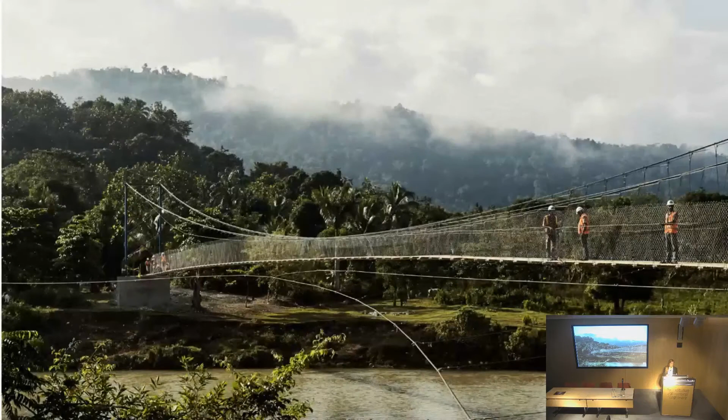That's so exciting, and bridges are such an obvious piece of human genius. Looking historically, to be able to cross from that binary, from having access to not having access, is just one of the most powerful sights.

So here's a community in Chameau in Haiti. This river is currently in the dry season, and I want to talk about this structure specifically a little bit later this evening. But can you imagine living on the far side of that river, and you're one of the 40,000 people where the only way to cross that river is to swim? Keeping in mind, this is the dry season. Can you imagine when you've got someone showing up and being like, hey, we could do something across that structure?

That is out-of-this-world kind of innovation. That is the aspirational quality that you can't even show in pictures or videos. You aren't really able to demonstrate what that means until you've actually had the opportunity to show someone in real time.

That innovation for us—I'll get into scale a little later—but the first time we go into a region or district, like Chameau, our first long span structure out in Jérémie in the west province of Haiti, people don't really get it. If we're thinking about not just connecting one river but connecting all people in an entire region, you have to go in there and do some of the hard projects up front when no one really knows what you're going to be up to.

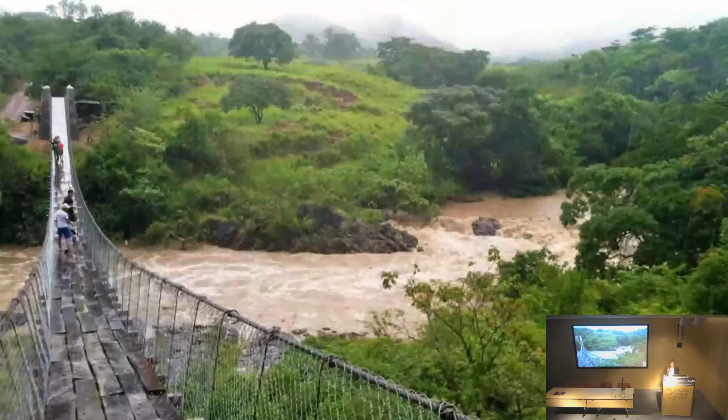I think you're crazy. But I've seen this over and over again, and I probably overdid the photos. What's exciting for me personally is that when I got involved, I was like many of you—I was in that place in life, thinking about what I could be doing with my engineering skills that would help humanity. That could be right there in Iowa where I grew up, or certainly in Colorado where I was going to graduate school.

But there was just some sense of, what am I going to be doing with my day that's going to be helping people? I hope all of us know everything we do is about serving society, every single day—that is why it is such an honorable profession. But it's hard to demonstrate to a young 22-year-old who's just graduated that all the physics and math, even if you love statics and dynamics, translates into people.

And the first time that I built a bridge—it wasn't this one per se, but it was similar—I had that profound sense of: this is why we do what we do.

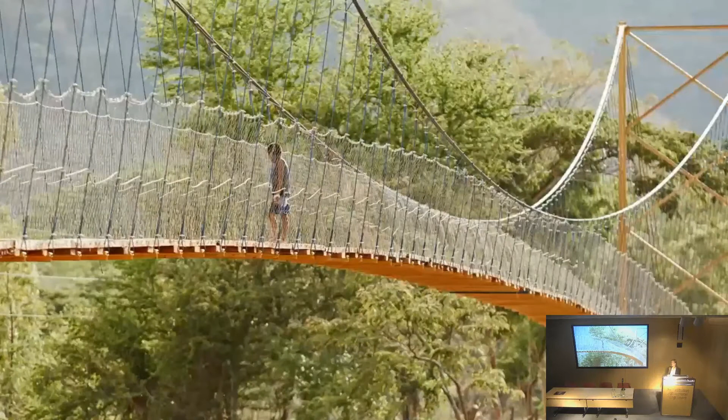And about a decade later, we're building something much more complex like this. It's actually not that different - it's a structure that is helping serve people. And I think what's really exciting for me personally and for the entire organization, Ian, our chairman, has seen us go through an evolution.

We really used to talk a lot about the bridge - how do we improve the design details every single day, how do we republish essentially a standard of best practices every year, how do we go bigger, go longer, go more efficient. What I'm here to share with you guys this evening is a little bit of why we are moving away from that. It still takes a global army, and it certainly still takes a lot of engineering.

But as we start to pivot and think about designing for the rural last mile, we're talking about innovation that is not going to be structure by structure. We have such a distinct privilege in the developed world to have resources, to be thinking about having signature projects that are unique in every place and prescribed exactly to fit the community and everything anyone could ever dream of, when budgets allow.

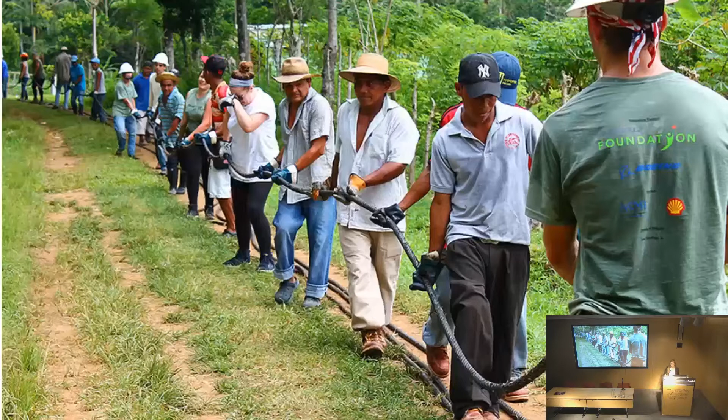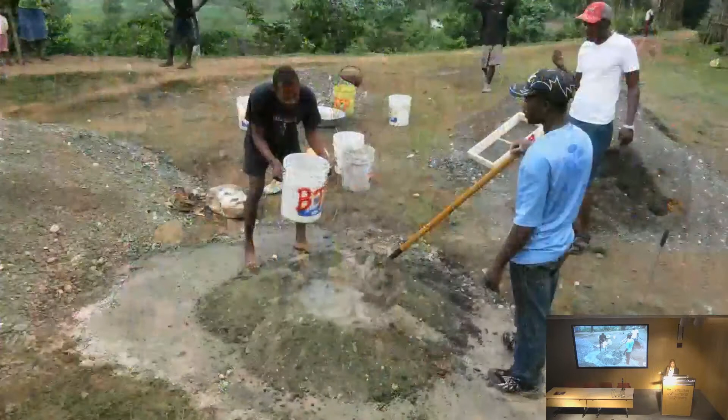And you're thinking about innovation through the lens of how are we going to get this super heavy cable up and lifted. And we're thinking about innovation in terms of how are we going to be able to maintain a level of structural integrity when you're mixing concrete in a volcano method - also one of the more fun, not fun, things to do.

Because I have the time, I'm going to tell more stories.

So one of the first things I did in Peru - I'm 21, I've taken a civil materials class, and I was really excited about having my scale with my gravel and knowing what my sand ratio was going to be, and I knew exactly the scale of the water was going to be, and I'd even written a little paper, the pre-construction plan for my team going to Peru. I'm thinking I'm really bright - oh man, this is way ahead of the game.

And then I showed up and I was like, well, these guys are already mixing. We haven't even arrived - how are we going to do cylinder tests on that? This is not going well. I'm in panic mode. I don't have any professors around. I don't know - everything I've read, this is not right.

And, lo and behold, you kind of start to realize that a lot of things that you're taught are correct, and a lot of things that you want to apply have to be learned. I think that's a really important lesson in this kind of work, great for young engineers in particular - just to conceptually understand the difference between measuring by weight and by volume. So if we're going to improve quality in a batch, that's certainly not going to happen because I all of a sudden, in a manual somewhere on the 20th page, prescribe a different kind of weight measurement.

It's going to be having photos and diagrams of 3 buckets of water, it's going to be buckets, it's going to be wheelbarrows, it's going to be shovels, it's going to be how many times do we shovel the one pile into pile 2 and how many times back to pile 3, and how are we going to teach what a slump test looks like using something that can be done with a soda bottle - thinking about innovation in those terms.

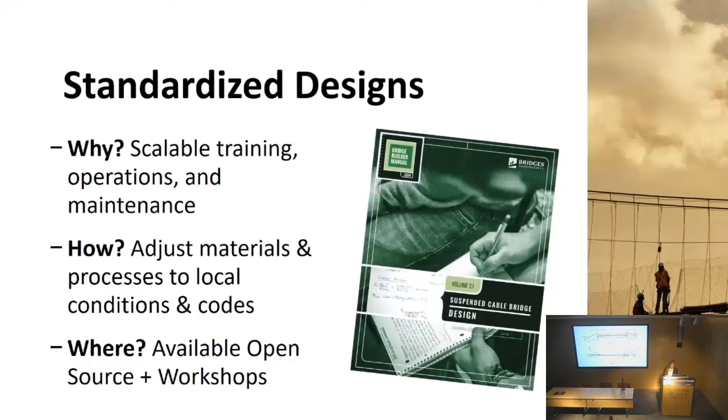10% of span roughly is our tower height, and that's predicated on a realistic sag value with a cresting structure under dead load alone. Under live load it should settle out. How do you get this up high enough to get a 3 meter freeboard unless you literally build your pedestals even higher?

So we go back to the technical advisory board and ask, is that actually going to be a better design element? Doing another meter of height when the waterway is going to come through and around your pedestal, you're going to have a greater moment arm, significantly greater moment on that foundation if you go another meter higher. I'll show you some details in a second.

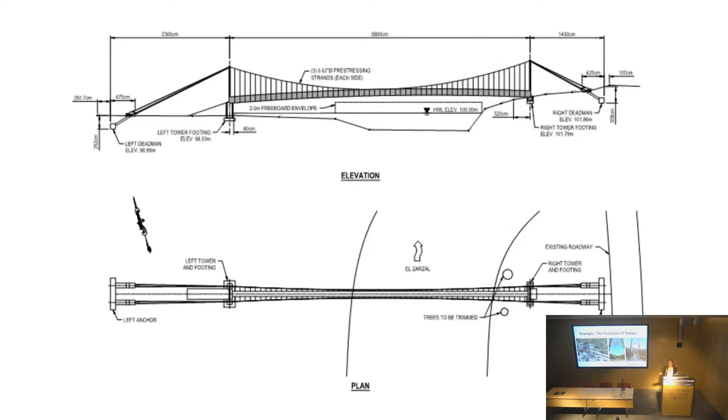Anyway, I could really go down a rabbit hole here, so I thought I'd share something that wasn't geotechnical, since that's my background. I was thinking, okay, I've got a bunch of structural engineers, what would they find interesting? Something I think is super interesting is the evolution of towers, and this is just one of a thousand different things we've iterated on over the years to get to a standard. But it's something that always brings up questions, like what could you do with this or that?

When we're thinking about standardized designs, we really wanted to find a solution set that could be variant, but also learn from our lessons. This first suspension tower design was quite creative.

So we're working in Honduras, and we hear downwind that there are a bunch of old telephone poles that have been left and abandoned, and they could totally be used for bridges. I remember talking with Jeremy Johannesson at McNary Bergeron, and he said, oh yeah, we can do that, let's do that. I was in his office before he actually went down to build this, and he said it's getting pretty heavy, because in terms of weight per capacity of this type of material, it's quite heavy in order to get the structural capacity.

Some cool, really interesting details, we're really proud of. It's like a little foot, I didn't mean to go into that, but it's interesting, they're able to get it up. But when he came back, he said, after action report, we will never do that again.

As it was starting to be tipped and on the A-frame, it actually fell because of the weight, but also because at that time we weren't using scaffolding for erection. The weight of that particular structure needed to be double-backed, one member on the other, to end up acting as a composite. It was kind of a never again moment.

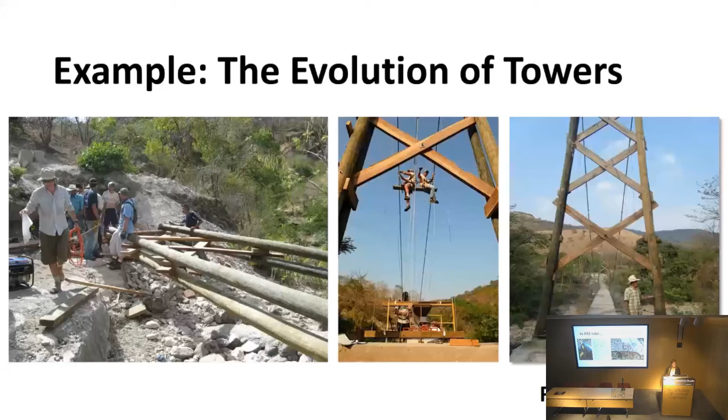So the next iteration, we were in Guatemala, and there was a pretty significant supply of tube steel. This time we're down with a guy from Arup, who many of you may have met, Manuel Contreras, one of our founders of the movement here in Europe around Bridges to Prosperity.

And we're sitting there tinkering, and we're like, okay, well, we could use steel. That would be a much higher capacity to weight ratio, and we could actually make it as simple as possible. All we're going to do is design a pedestal footer detail that would literally just pocket. So we can get the steel, put it in the pocket, put some quick cement in there, and it's going to be in the vertical.

We'd allow for, sorry, I get so excited, lots of movement. So you're pocketing the HSS tube into what we designed as a 5-gallon bucket that ended up hollowing out and had all the steel around it. Then we'd plop it in there and quick set it. We wanted that quick set to crack, which would allow some movement, and that it did.

So I think one of the lessons there was it was very difficult in practicality to actually get steel to pocket, because we're thinking about everything being lifted by hand. You could certainly design a pulley system there. I can see Will up here really gearing in, like he's going to solve that problem. But we were really trying to think about what is going to be safe and standard and something we could do all around the world. And that wasn't going to be it.

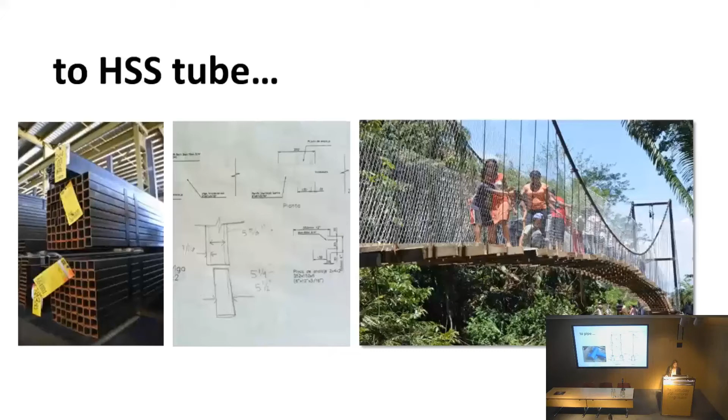So we moved on. And I think what's really allowed us to reach new heights and new spans and to be able to be standard has been having a moment hinge.

So if you can kind of tell, I've got some drawings a little bit later that will help fill in the gaps. But our pedestal has just vertical bars that are tied together, and you have essentially a male and female piece that just allows it to rotate.

This is all pre-welded. We try to work with local universities to get the welding done there, to also build capacity with what we expect to be quality welds. We don't currently do anything on site. Then you just end up coming in, bolting the bottom piece, which has already been embedded, with the top piece as you're bringing up and erecting the towers.

And I think what's kind of interesting here is, as we're thinking about how do we go to scale and how do we build as many of these structure types as we need to, whether the tower is 8 meters or 12 meters tall, it's actually a really similar detail.

And we've worked with engineering teams all around the world to help us get that rebar pattern set in such a way that, yes, it's really robust and oftentimes very redundant. But going back to it, it's actually more important for us to be able to train our local teams to build this consistently with a high level of quality than it is to iterate back and forth every single time and say, well, actually, that's too much bar.

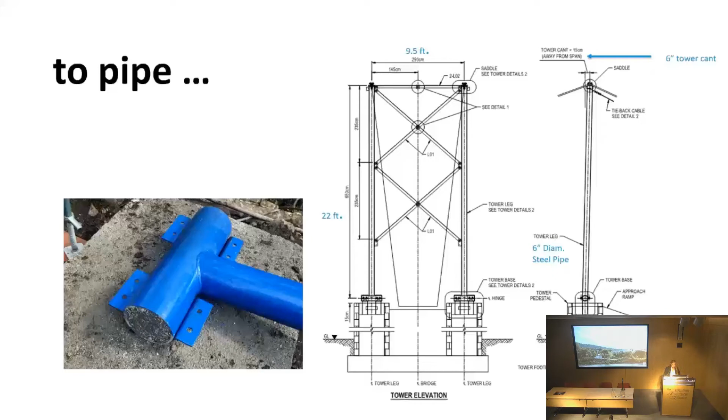So that's really the reason why we're able to serve communities like Shamo and Haiti. We never would have been able to reach it with tube steel, which would never be able to have the buckling capacity to span this kind of length.

So this is actually allowing the movement, which is kind of fun. So in an earthquake event, even taking that a bit further, you're expecting there's actually a very flexible structure type, and that serves us tremendously well.

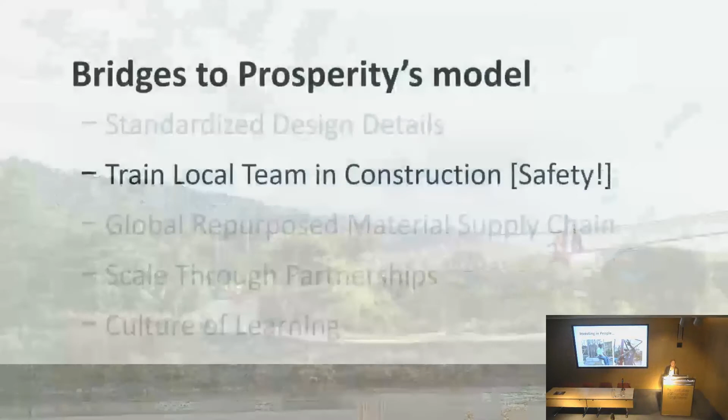Okay, so not only is it about designing, which is really fun, but it's also about building. And I think one of the things I'm most proud of is we're thinking big picture about who's going to solve the problem in Nicaragua. It's not going to be me, and it's certainly not going to be Ian. It's going to be Esteban Palma. Esteban joined our team in Nicaragua in 2010, maybe 11, and has been a champion.

Here's a guy that we had a really great idea with, getting into reinforced masonry towers. Notice I did not include that in the tower iterations, there were lots of other ones. We did our after-action review, and the design team actually loved it. There's all sorts of efficiencies here. We know that we see CMU block everywhere. There's a way that we can quality control CMU block where essentially I wasn't even touching it.

So you drop the block, and if you're at arm's length, if you drop it and it doesn't break, it's actually sufficient for just being formwork. Other organizations have come up with interesting back-of-napkin ways of checking material quality control. So we're like, this is great, this is going to solve all our problems. We can do reinforced masonry everywhere, and we can really quickly check the quality. Whereas if you were to do a cast-in-place concrete tower, good luck trying to QC that.

So Esteban comes back, and I remember in the same month he's just built a 65-meter suspension bridge with reinforced masonry, and something almost exactly the same span with steel. And he's like, Avery, never again, we are only doing steel. Because he's thinking from a safety perspective, like how hard it was for him to be doing three levels at a time, raising the scaffolding, et cetera. But these are the folks that have really made the organization great.

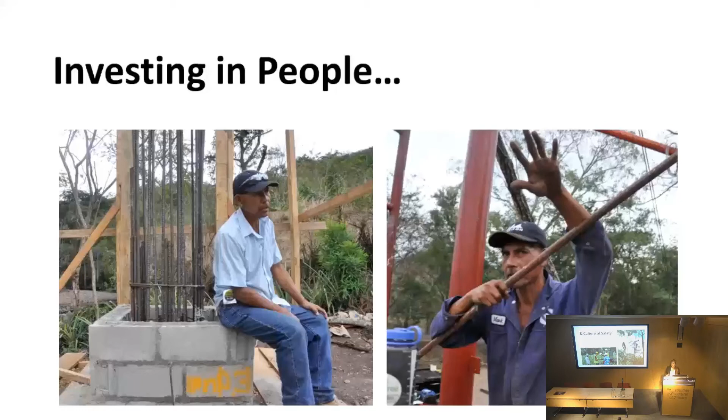A big part of being able to train an army of people to do this is to understand that the culture of safety that we expect is far in excess of anything they've ever seen before.

My experience in a rural context, like in Panama, for example, people are so used to seeing in Panama City guys in vests and hard hats, and they think, oh yeah, we totally get that. But that's not how we do it out here in the campo. The reasons people do safe construction practices are so you get home safely tonight.

So when I say that we are here to provide safe access, that's actually about our employees and our staff and our community members being safe when they come home, as much as it is the community member being able to be safe 20 years down the road.

In terms of being able to train an army, if we have a reputation of building bridges as quickly and efficiently as we can, but we don't care about our people, and we don't care about designing details to make them constructible, I think we're really missing the point. And I'm really proud that our board of directors has taken a lot of leadership in saying, do this right or don't do it.

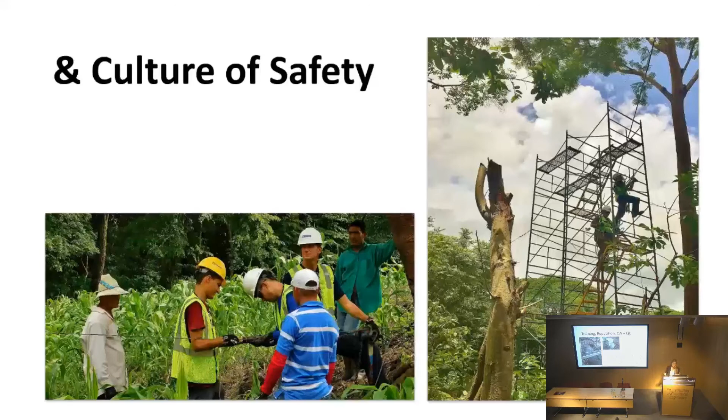Training and repetition, a big part of why we standardize, is to be able to have repetition of details. So thinking about what the teams could be doing before we show up, before an industry team arrives, what has been done already is actually pretty standard and repetitious, and things they can just take photos of.

We have an engineer coming on site to do spot checks on certain preset dates and times. But ultimately, our local crews, which don't always include local engineers, are able to do a lot of the substructure work without us. And that's super exciting, because we could also use the same kind of design details for schools, hospitals, or water systems.

Being able to train an army of people to do things at a high level of quality, that's easy to apply a QA program to, and since you're repeating it, you can really make sure that it's being understood through the on-the-job training.

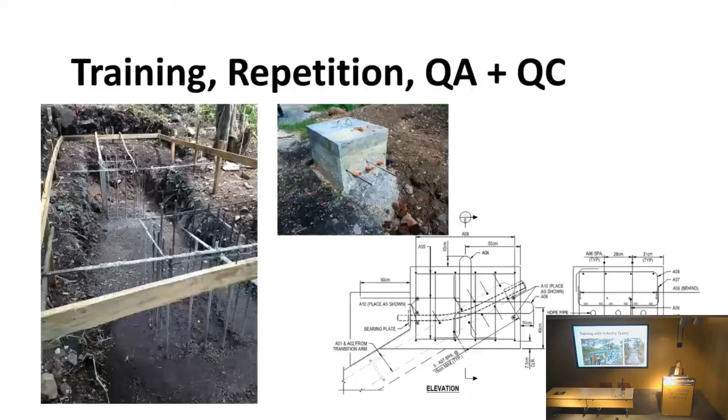We think this is a really important part of what we do: once we work out details and new ideas, getting industry teams on the ground to help our teams professionalize. We just had a board retreat here in London a couple weeks ago, and the role of the industry team was front and center. If you think about expanding geographically, what better way to build a culture of safety and train an army of local staff than to have some of the world's brightest minds come down and help translate something standardized to a local context.

And it doesn't happen in one project. For those of you that have done this, it takes... oh no, I think I might have it on a timer, I didn't realize that. Sorry about that. It's a really important part of what we do.

So I figured by 45 minutes in, I had lost almost everyone to sleeping, so I thought I'd go to video time, which I think some of you guys have probably seen, but I tried.

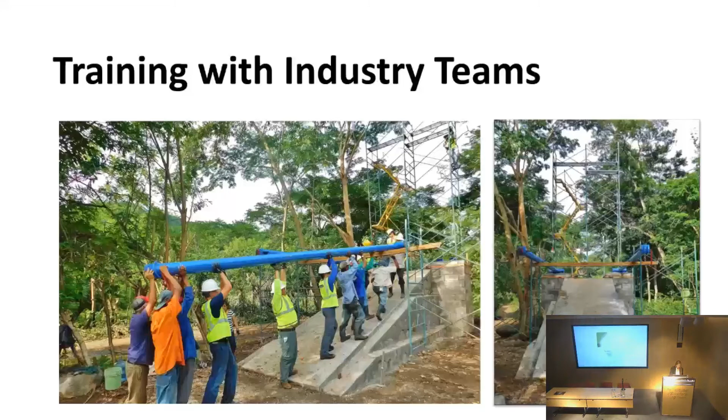If it wasn't clear what we did already, this should help. And this should have sound.

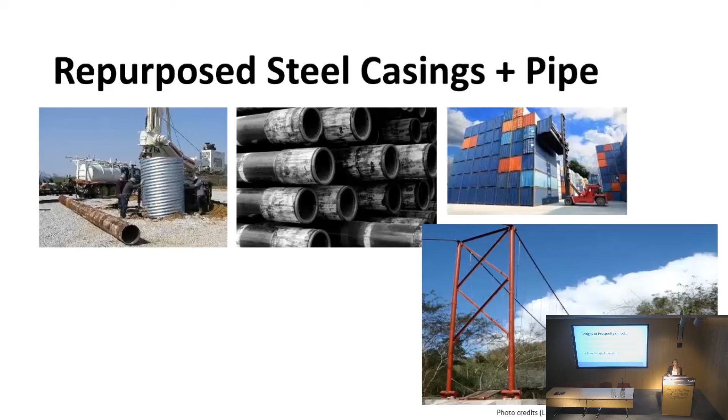We scale not only by showing up and sending materials and good luck, but through partnerships. Every time we work on a project, the community is there 100% of the time and 100% of the way. Some communities, that's free labor; in other places it's not—it's all dependent on the local context. But those are the folks creating a bridge committee, helping us understand why they want a project, who's going to show up to work on it, and what they'll do to maintain it. They're the ones showing up for months before any of us come in to tip towers, so it's a big part of their investment in the project.

We also work with local governments, and I think this is increasingly more important. Going back to the Rwanda example, think about 350 bridges—those are projects the Rwandan government is currently paying for and will continue to do so in an even more meaningful way.

We work with private industry teams too. Going back to how we create a quality of care and standard around our work, pulling in people who will poke holes in what you do, who are the smartest people in the world, is a really good way to do it. It also translates to inspiring folks in our industry to think about how amazing engineering really is as a career, and how impactful the work we do every day can be felt in one single project.

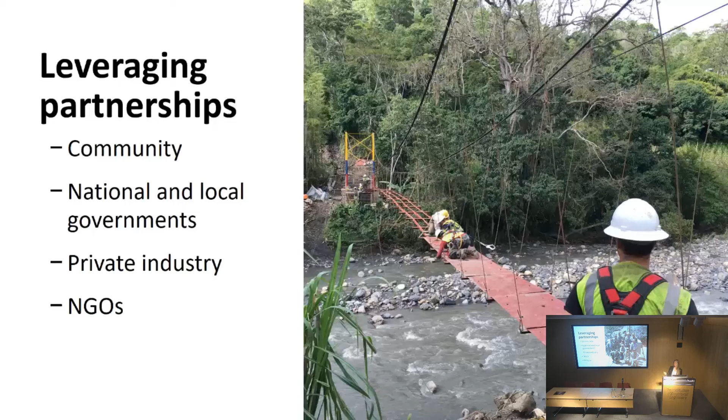We've also trained and worked with military folks, including the U.S. Navy Seabees and local military alike, thinking about who has dollars to spend—a lot of development work actually happens in the military. We're really proud of a lot of the partnerships we've had there.

In closing, I think the promise to tell you something you hadn't heard before is about our culture of learning. That's something that's really been an internal process and something we don't publicly talk about yet. But we believe that as an organization, if you can't fail—and fail fast and fail frequently—and have enough humility to talk about that, we're going to be in a very dangerous situation.

It certainly might reflect the fact that we design fracture-critical structures that are life-saving, but also carry a lot of potential downside—and we're a young team. So if we don't learn from the people we surround ourselves with, and if we don't bring in the best and brightest and learn from them, it's a terrifying situation that I wouldn't want to be in.

So the culture of learning is actually the very core of what we do every single day, as a team, as folks back in Denver, as a board of directors, and even thinking about those of you who have traveled with us—how important the calls are for us to learn from what we did wrong and how we could improve. I can't tell you how much time we spend thinking about it. But it's also about learning what we're doing right, and celebrating the successes.

We're just finishing a 3-year randomized control trial. We intuitively think these bridges make a pretty profound difference, right? The other organization, Helvetas—they're amazing, by the way—does this work in Nepal, and they've spent 30 years evaluating how bridges impact communities.